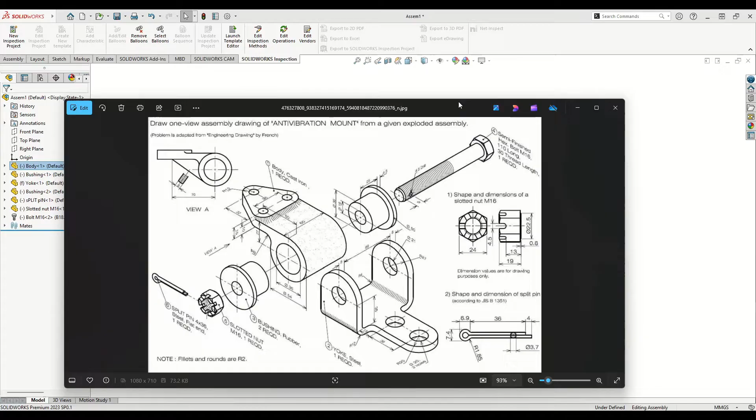So let's begin with this part. Let's open a new SolidWorks document, select Part, and press OK. Now let's make this plane white, and we'll open a sketch in the top plane.

Here we'll make the next sketch. Let's make a center rectangle, just like this, and now let's define this. Here will be 69 millimeters, and this other side will have 54.

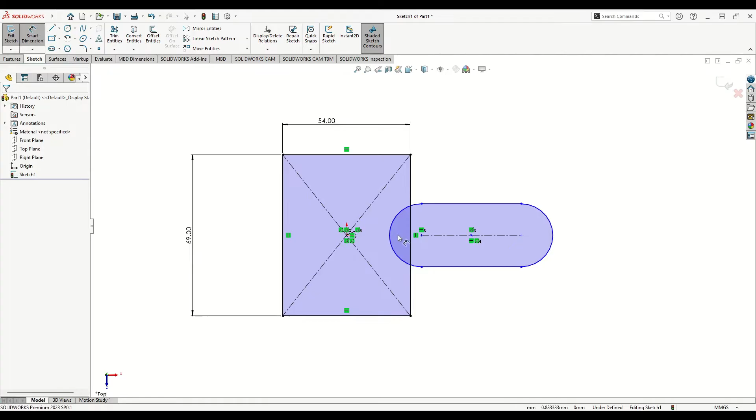Now we'll select straight slot to make the next part just like this. Select this point with this point and make horizontal. Now smart dimension - the radius here will be 20 millimeters.

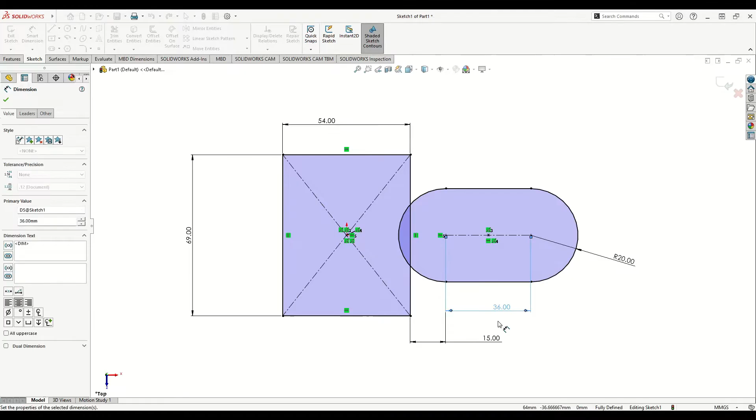From this point to this center point here will be 15. This line, between these two center points, will be 36. And now this is fully defined.

We'll have to use trim entities command to cut these two parts, and apply some more dimensions around here to make them fully defined again. So let's use trim entities and cut these two - press OK, and cut this also.

Select this point and make tangent. Do the same with this other one, make tangent. We'll make all of this tangent.

Now with smart dimension, let's give here a dimension. It doesn't matter - you just have to leave it like this. Actually, it does matter, don't move it up or down - it has to be this dimension.

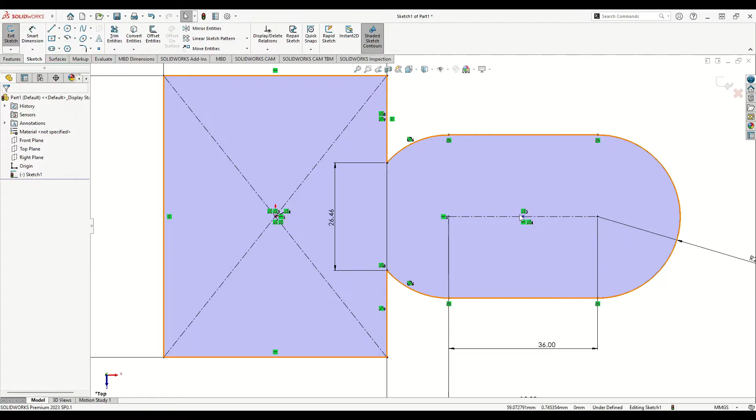Let's make two more circles at these two points. Select circle, one here, select them both and make them equal. Now with smart dimension, let's give the diameter - it will be 20 millimeters.

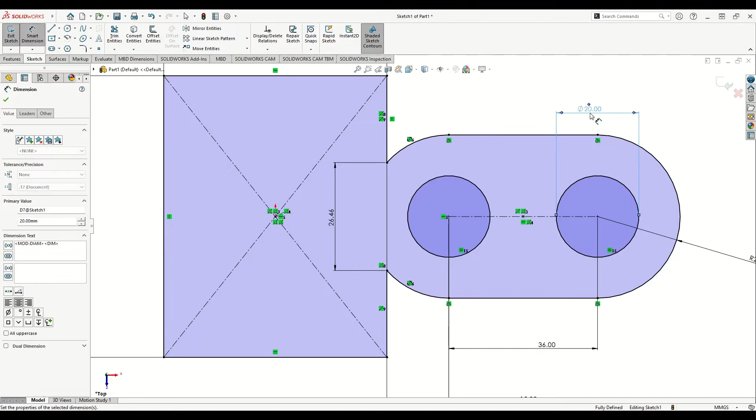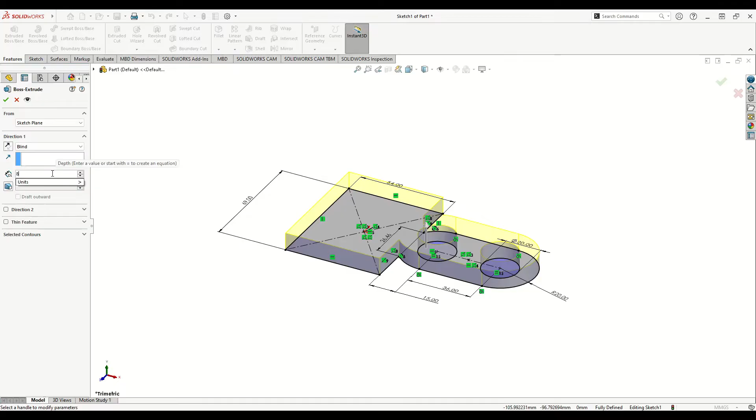Okay, and this should be everything. Now go to Features and use Extruded Boss/Base command. The thickness here will be 8 millimeters. Press OK, and now we'll apply some fillets on these two sides.

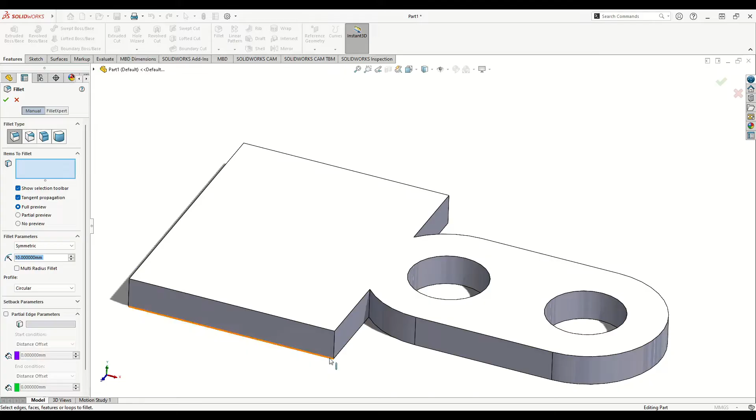Select fillet - the radius isn't given on the drawing, but we have another one for this edge which is 12, so we'll use 12 here too. The drawing says fillets and rounds are radius 2, but that's too small for these two, so let's go with 12. Select this edge and this one, press OK.

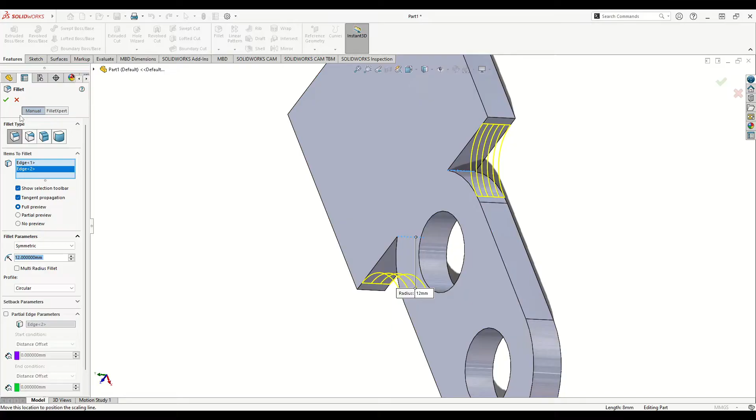Now select this face, open a sketch, and here we'll make the next drawing. Select line and go just like this. Now select center point arc, and make an arc just like this.

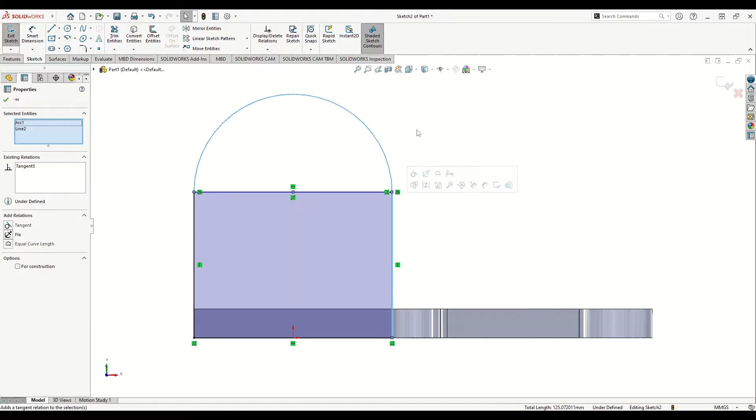Select this arc with this line and make tangent. Do the same for this side. Now select this line and select construction geometry. Let's give this arc a radius dimension - this will have the radius already. We need to give a dimension from this center point to this edge.

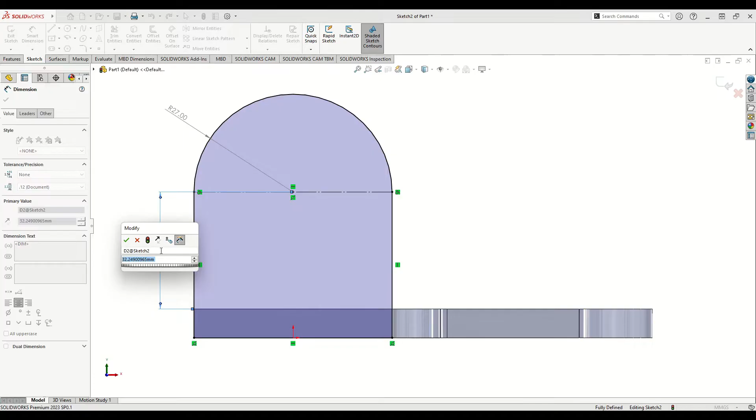This will be 35 millimeters, and now this will be fully defined. Let's select circle again, and make a circle with diameter 21 millimeters. Alright, this is fully defined.

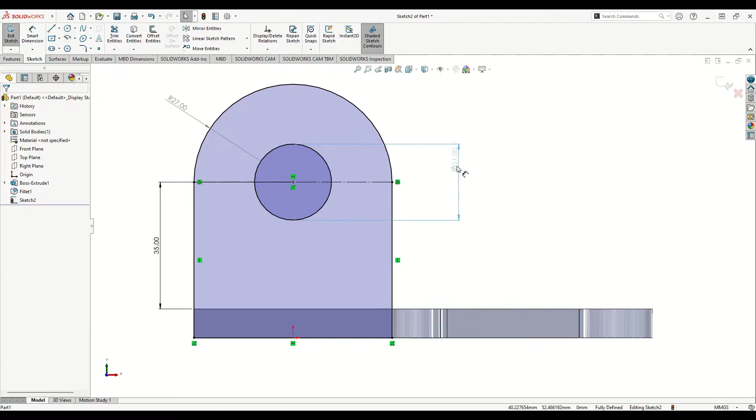Now we'll go to Features and use Extruded Boss/Base command, making sure it extrudes outwards, not inside this part. The depth here will be 8 millimeters. Press OK - I'll have to do the same on the other side, or let's see if we have a plane

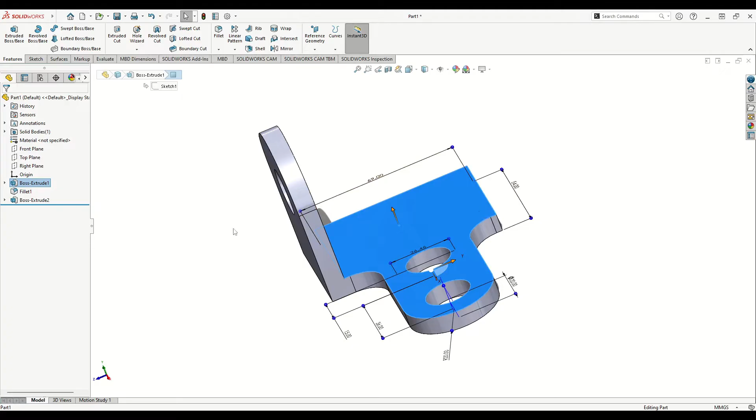inside this part so we can mirror it on the other side. We have the front plane in the middle, so select front plane, go to linear pattern, select mirror, and the front plane should be selected here. Then select features to mirror, and select this body. Press OK - now we have them both.

Now let's check the dimension between them to see if it's correct - it should be 69 millimeters. We'll go to Evaluate, select Measure, and select this face with this one. We see the blue line is the distance between them, and it's 69 millimeters, so this is good.

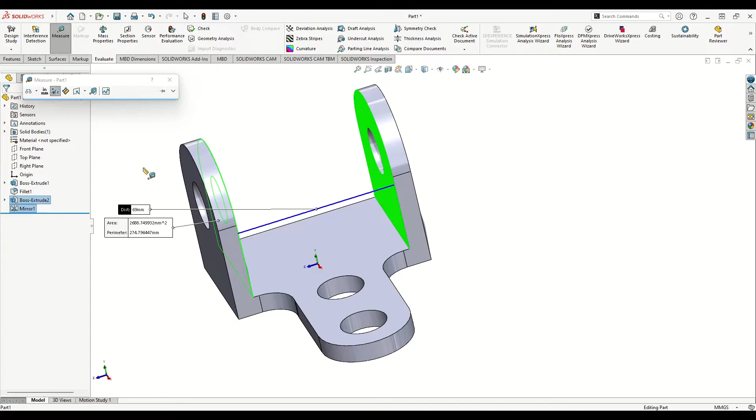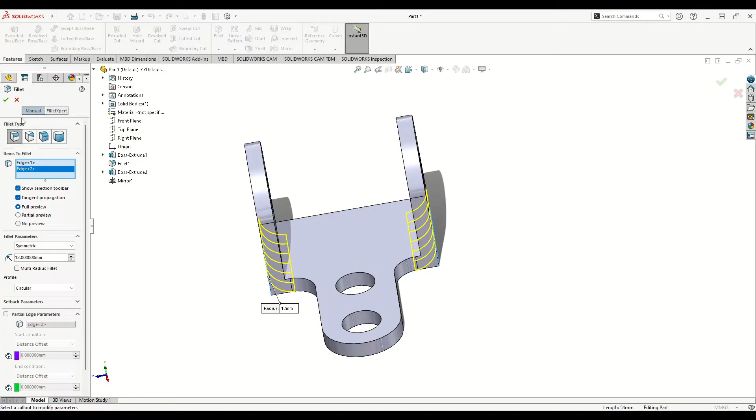Now we'll apply some more fillets to this part. Let's go back to Features, select fillet. The first will be radius 12, for this edge with this one - press OK. The next one will be radius 4, for this and this. Press OK.

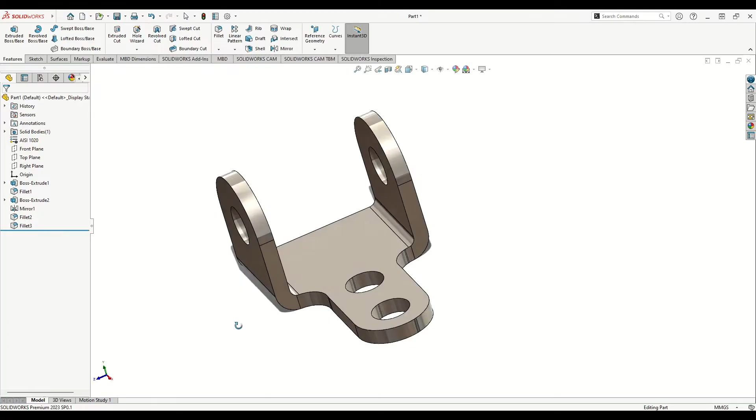Now this should be everything for this part. We'll assign the material - right click on material on the left, Edit Material, and select steel. It's not specified what kind, so I'll go with this one. Apply and close, and I'll have to save this - Save As, and the name.

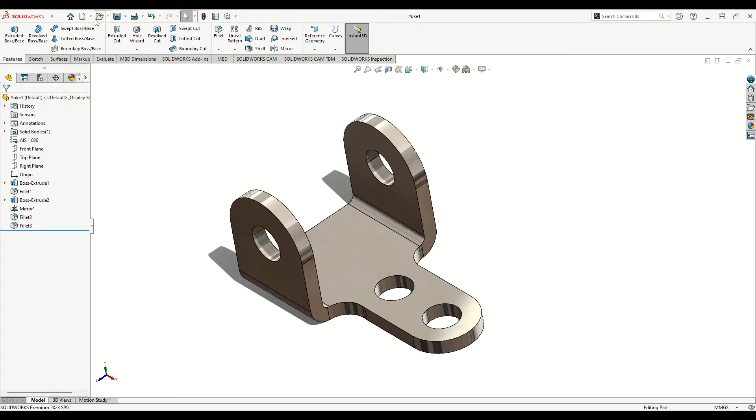We'll have to make a cylinder. Now it's smart dimension, let's define this. The first diameter will be 54, and the smaller one will be 36. Okay, and now let's go to features, use extruded boss base command. And here instead of blind as the direction, we'll select mid plane, because we have to make a rib later, and this will help us to make the rib easier. Because the rib sketch will be made in the mid plane of this cylinder. And now here the depth should be 60 millimeters.

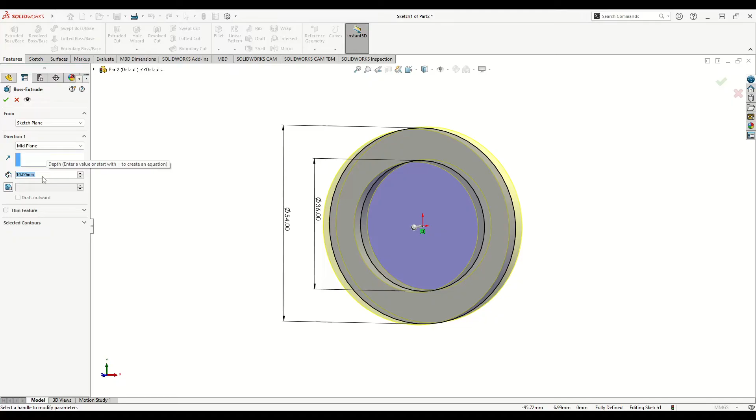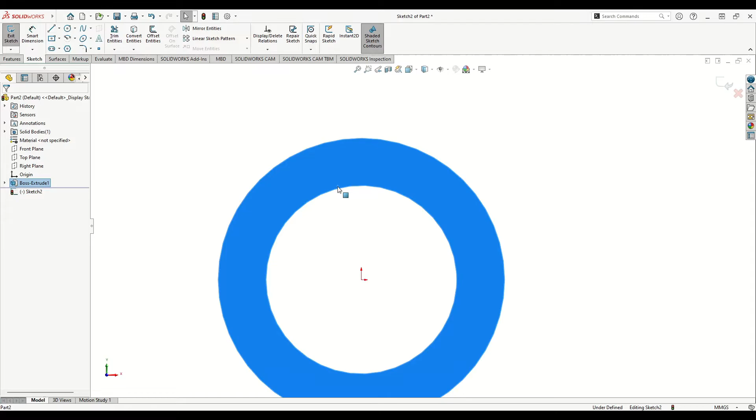Press here OK. Okay, this is looking good. Now we'll have to make the next part. Let's open a sketch on this face, and we'll start by converting this edge. So select this edge and then go up here to convert entities command. And now we'll select line and we'll make the next sketch.

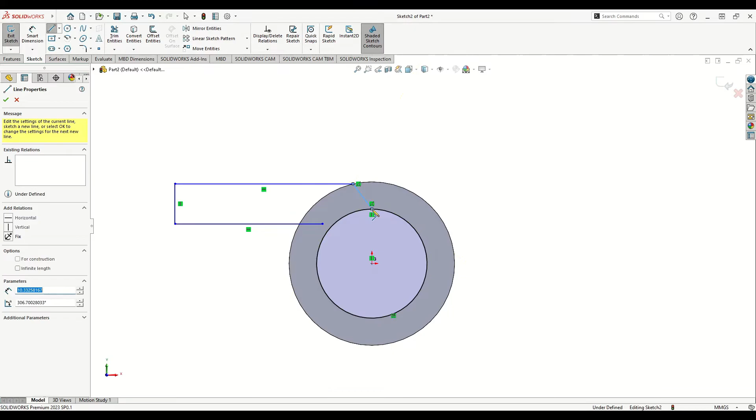Okay, this line should not be tangent to this. So just make a line and then we'll go like this, and then here it should be tangent and then back to this point. Let's select this line, select this edge, select here make tangent, and now select this point and select this circle and select here coincide. And now it's smart dimension.

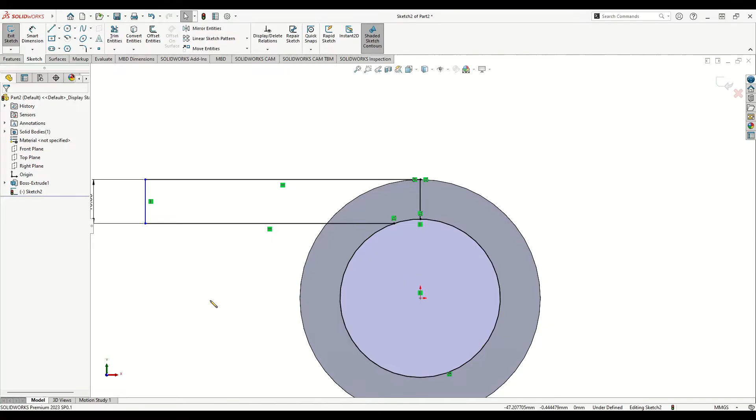Let's give a dimension. Here this line will have 10 millimeters. And now this is looking good. And here we'll have to give another dimension. This dimension will be 50 millimeters, plus 32, plus 12. Okay, so this is the length for this line, will be made from the 3 dimensions we have on the drawing.

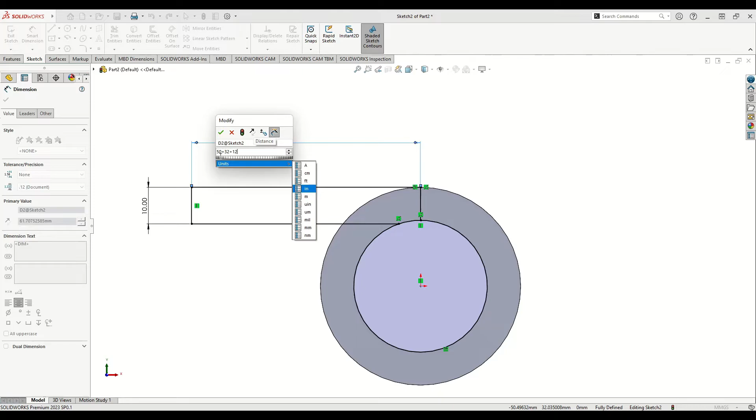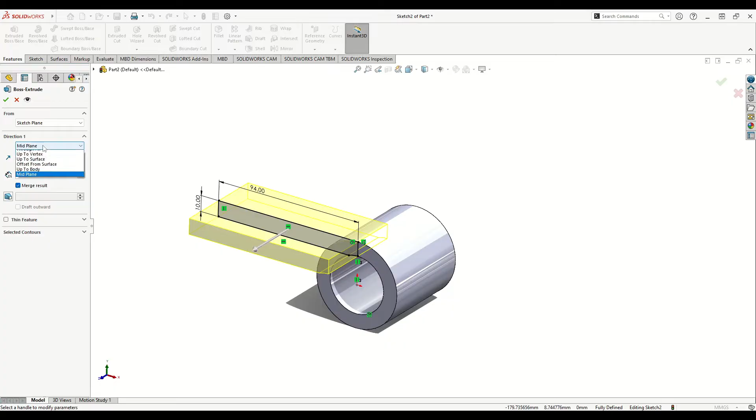And press here OK. Okay, and now let's use trim entities command to cut this extra part of the circle. And now we should have a closed contour right here. Let's go to features and use extruded boss base command. And here instead of mid plane, we'll select here through all, and we'll select here reverse the direction. Press here OK. Now this is looking good.

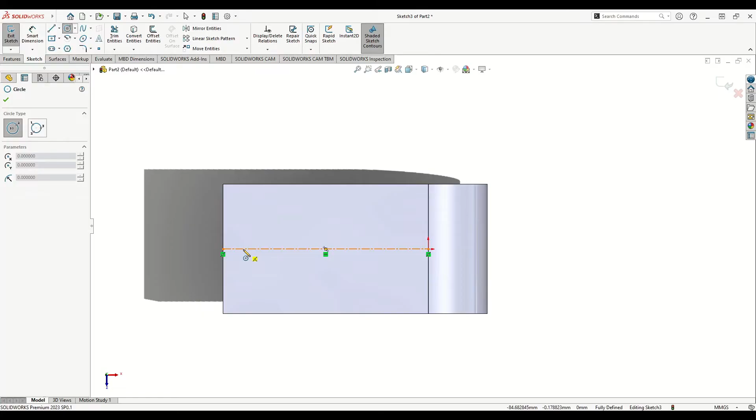And now let's select this face and then let's open a sketch. Here we'll have to make the next sketch. We'll start with a center line, just like this. And then we'll select circle. We'll make one right here, one here, and then one here. Okay, make them all 3 equal, select them, press here equal. Then we'll select this center line and these 2 circles, select here make symmetric. And now with smart dimension, let's give a dimension for this.

The radius will be using it as, actually not the radius, the diameter, as 12. We don't have it on the drawing, or maybe I'm missing it. I looked for it a lot, I cannot see it, so we'll just use 12. Because we have here, let's make a center point arc, starting from this center point, make an arc, and the arc should go like this, and this arc will have the radius 12. In many cases I've seen that when we have this kind of situation, like a circle concentric with an arc, usually the circle has the diameter as the arc has the radius. So we're gonna apply the same thing here. I'm not sure if it's the case, but I cannot find the diameter for these circles, for these holes on the drawing. So yeah, let's keep going.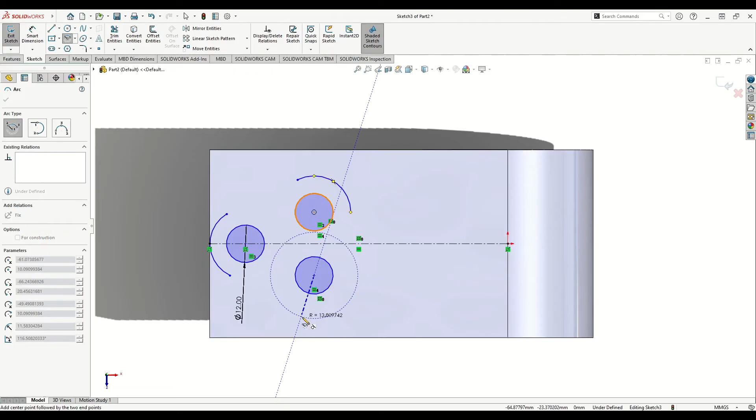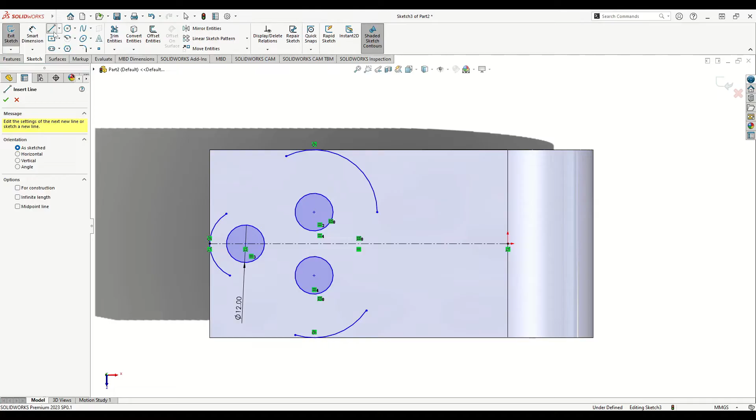Let's make the same thing. We'll make another one and right here another one. Okay, let's select this circle, this arc with this edge, make here tangent. Let's do the same for this one, tangent, and for this one, tangent. And now we'll have to select line, and we'll have to connect all of these ends like this. Select here this point, select here make tangent, do the same for all of them.

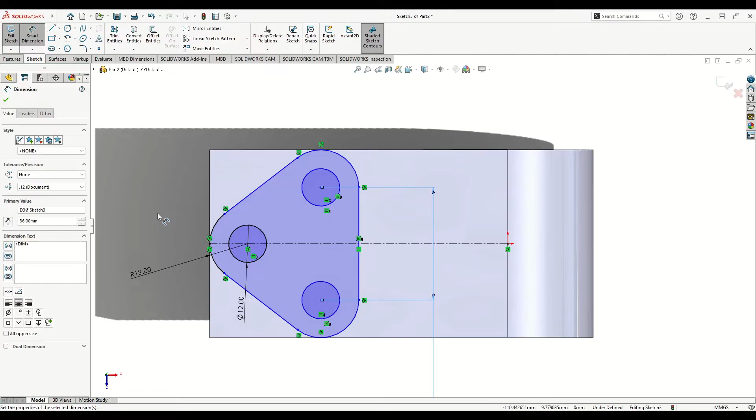Okay, and now with smart dimension, let's give a radius for this. Arc will be 12. Okay, and now we'll have to give a dimension in between these two, and here will be 36. Press here OK. And now another dimension will be in between these two center points, and here will be 32. And now this is fully defined.

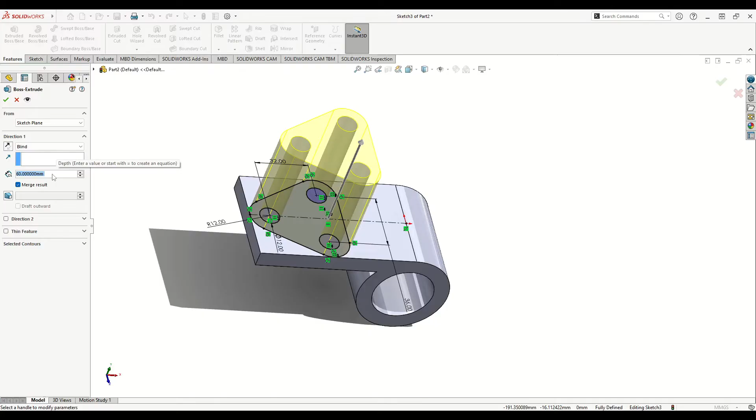Now we'll go to features and we'll use extruded boss base command. And here will not be through all, will be blind as the direction, and the depth will be 60 millimeters. And make sure that it's going up. Press OK. Nice. And now we'll have to make the next thing.

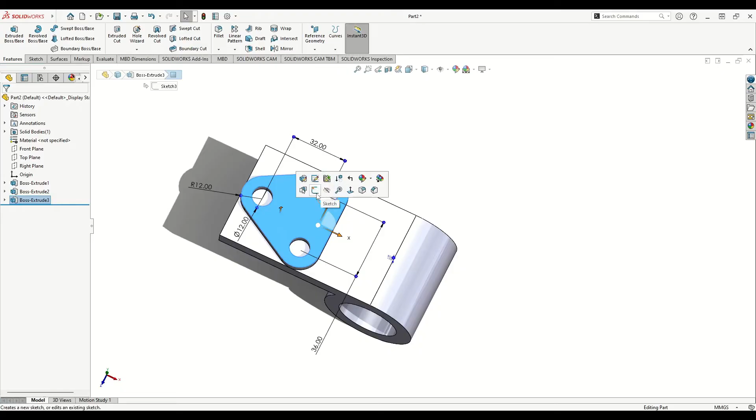Let's open a new sketch on this face. Okay, and here we'll have to select this face. Actually, no, select these 3 circles. Select here convert entities command, and then select convert entities command again, select this, and press here OK.

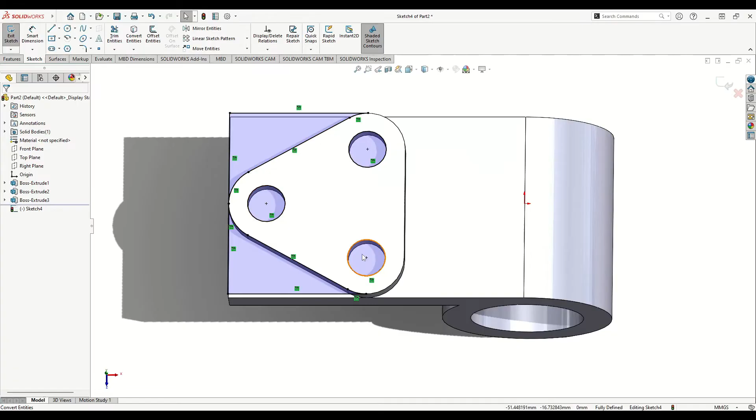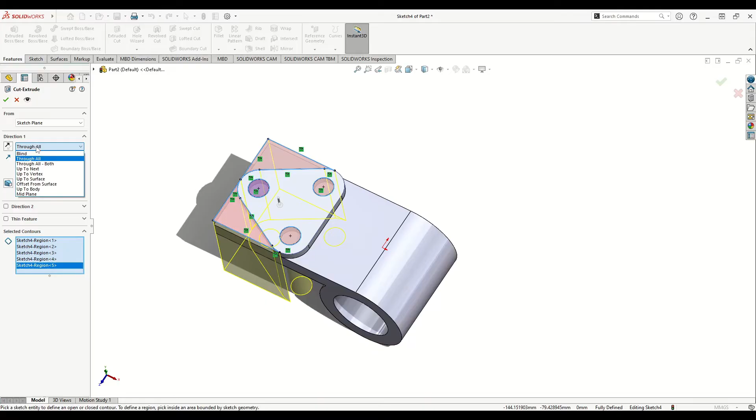Now we'll have to cut this extra material. Go to features, use extruded cut, and select the contours we want to cut, so this and these 3 holes. Press OK. Actually, select through all, or better keep it up to next, because later we'll have a rib, so we don't want to cut anything from it. Press OK.

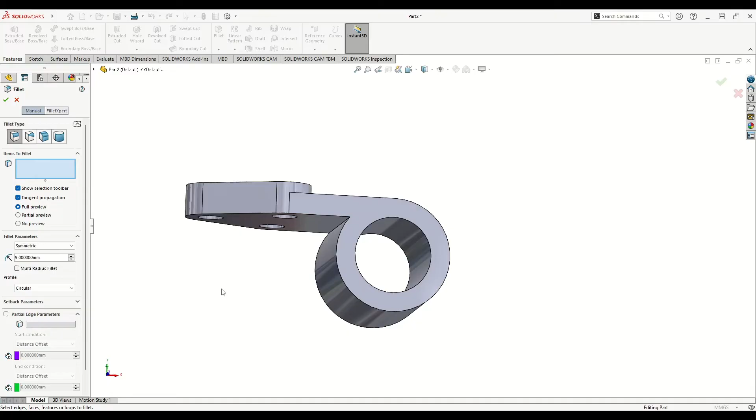Now this is looking better. Let's apply a fillet with radius 9 millimeters. Select fillet, here will be 9. Let's select this right here and press OK.

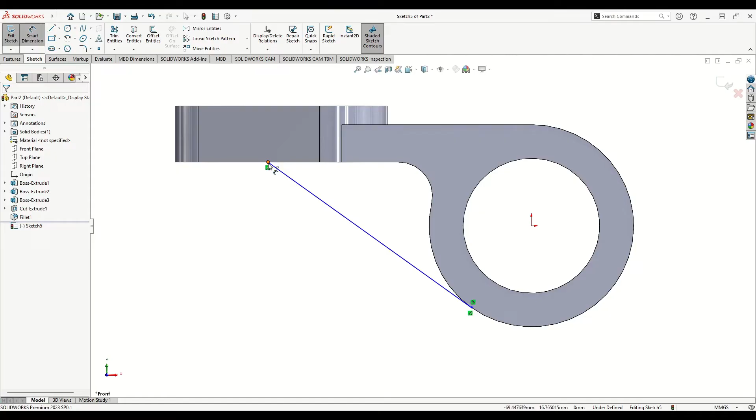Now we can make the rib. To make the rib, we'll use the plane we kept in the middle of this cylinder, which is the front plane. Select front plane, select sketch, and now the only thing we have to make is a line. Make a line just like this. This line should be tangent to this edge, so make it tangent. Now with smart dimension, let's give a dimension from this point to this center point, and here will be 70 millimeters.

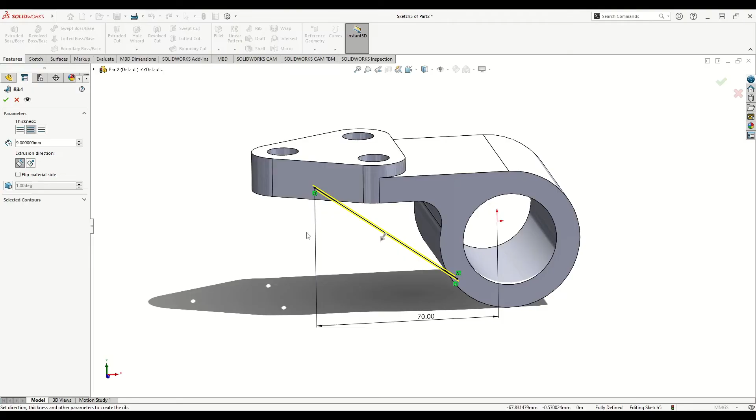Now this is black, which means it's fully defined. Let's go to features, select rib command, and here the thickness for this will be 9 millimeters. Keep this both sides for the thickness, and then select this arrow to be upwards. Select flip material side. Press OK. Now we have the rib.

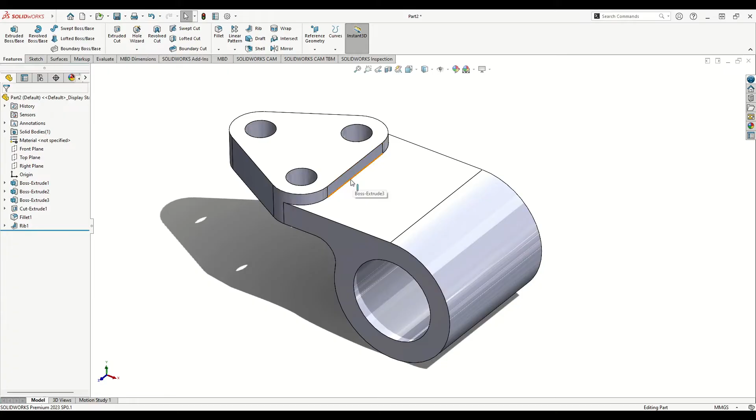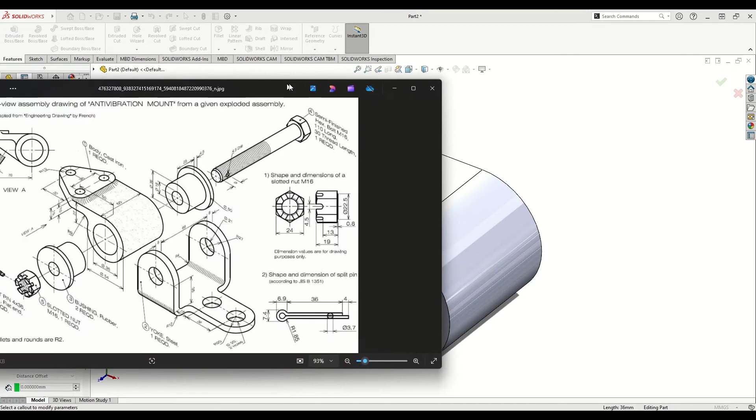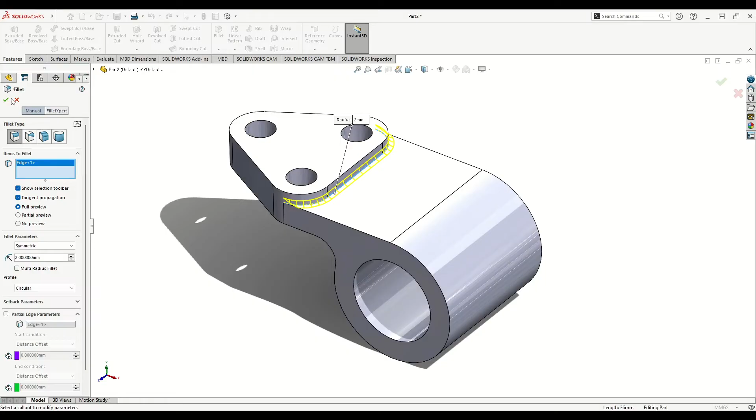This is almost finished. Now we only need to apply a fillet right here. As it's saying on the drawing, all fillets and rounds are radius 2. We can use radius 2, but when you look on the drawing, it's looking like it's more than radius 2, so we'll just make it 2 for now. We can see it's a little smaller, but if we make it 4, it's exactly as showing on the drawing. I don't know how accurate this is, but I cannot see a specified radius for this, so we have to use radius 2. Let's make it 2. Press OK. Now this is finished.

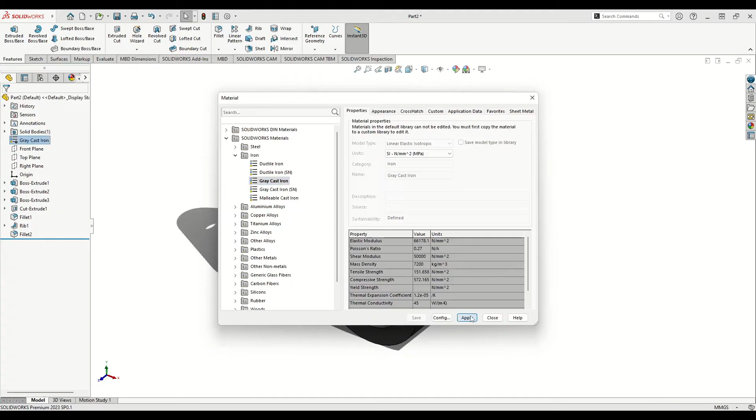Now we'll have to apply the material, which is cast iron. Right click, edit material, and we'll go to iron. I don't know which one of these, but we'll go with this one. Apply and close. This should be it for this body. Now let's save it and move to the next part.

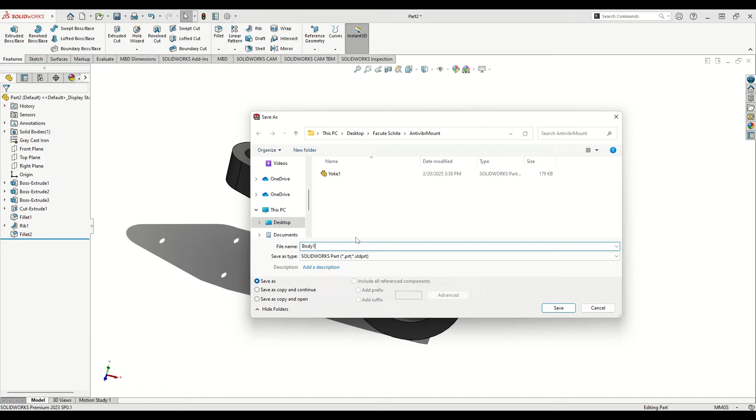Save as. This will be the body. Save, and now let's go and open a new SolidWorks document, a new part.

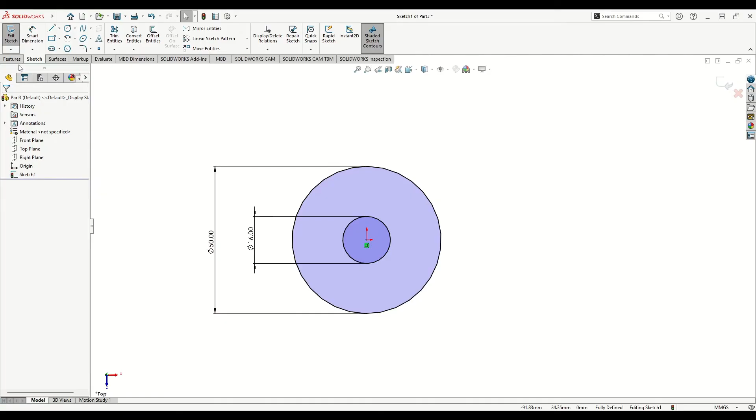Now go to features, use extruded boss base command, and here the thickness will be 4.5. Press OK. Now we'll open a new sketch on this face. Here we'll have to select this edge, select convert, and I will make another circle.

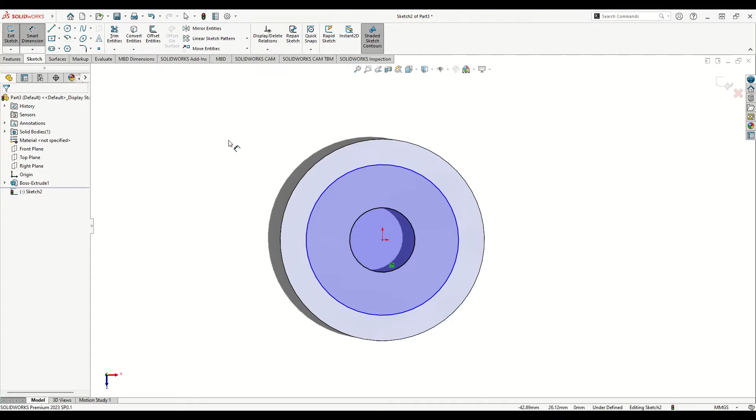This one will have diameter 36. I'll go to features again and use extruded boss base again. This time here will be 25. Press OK. Now this is the bushing.

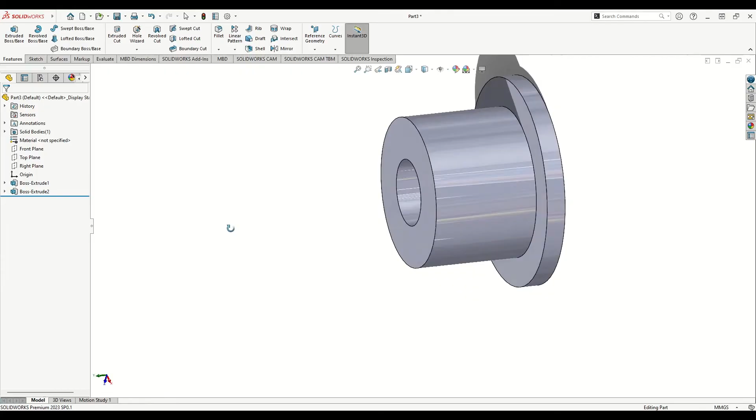We'll have to apply some material to this one also. So right click, edit material. This one will be made from rubber. I'm not quite sure which one, so I'm gonna select this one, silicon rubber, and close.

Okay, this is the bushing, the last part we're gonna make, because the nut and the split pin I already made 2 tutorials for them, so you can make them from those tutorials and then assemble all of them right here. Now let's save this one also.

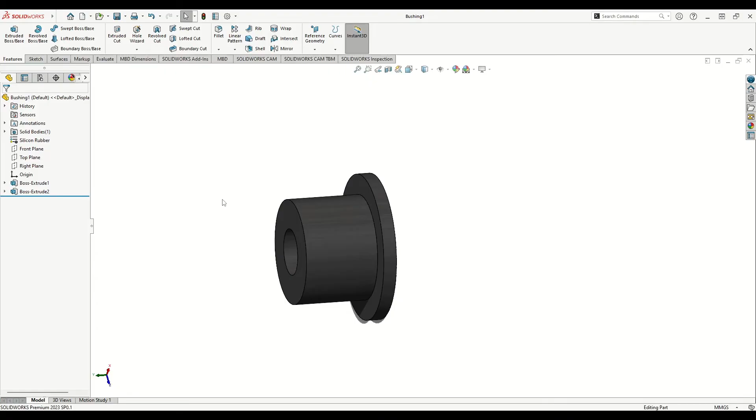Now let's assemble all of them. Let's open a new document, assembly, press OK, and let's insert all of the parts we just made right now. This one, and this one. And now I'm going to search for the next one, the other parts.

When you want to insert other parts into your assembly document, you'll go to insert, component, existing part assembly, then go to browse and search for your parts. Here one of them, this is the split pin. Now we'll have to insert the next one.

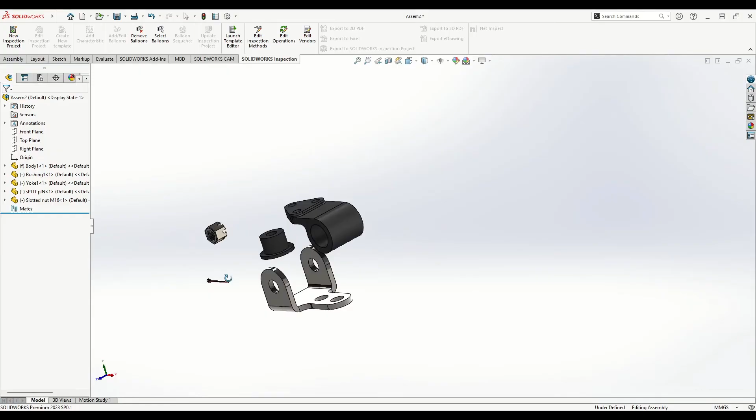Insert component, existing, browse, and then the next one, the nut. Then we'll have to insert also the bolt. To do that, go to design library, on the right, toolbox, use the metric one, then bolt, screw, hex head. From here we'll select one of these 2. We're gonna select this one, hex bolt. I'm gonna right click on it and select create part, because we want to edit something.

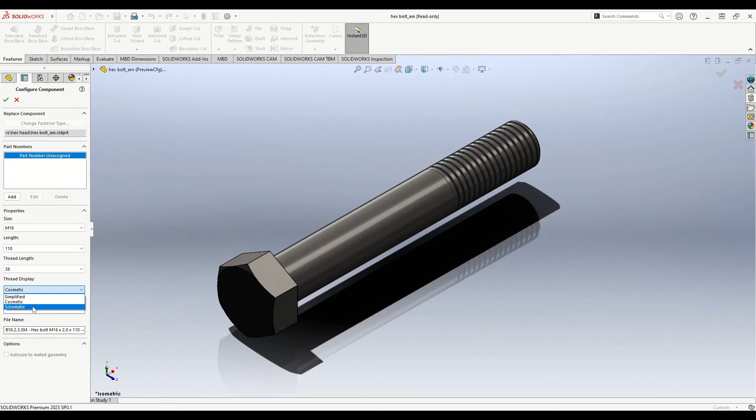So we can choose here the size. The size will be M16, the length will be 110. The thread length on the drawing says it should be 30, but we cannot choose 30 from here, so we'll go with 38. Each of these options looks similar, nothing special, but I'm going to keep this one because it's looking better. Then we'll press OK.

Now we'll have to search for it. It should open in a new window. Let's make this plain white. Now here on the left we can see that we are at properties.

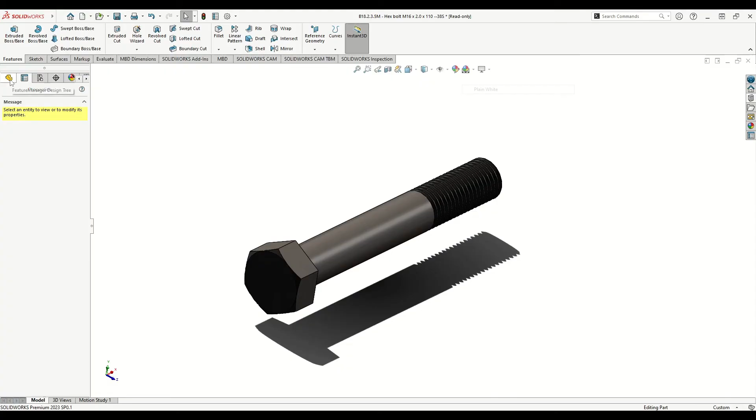We'll go on the left at feature manager design tree, and here we'll have to add a small hole in this bolt for the split pin to go in. To do this, we'll have to find the plane which is in the middle of this.

We can see that this plane is in the middle, plane 1. So select plane 1 and select here to open a new sketch. If it asks you something like you are about to change or edit this, just press OK and you should be fine.

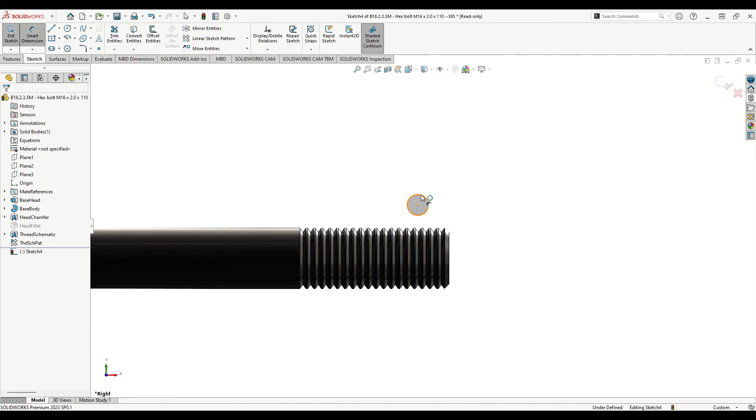Now let's select circle and make a circle here. We're gonna move this right here. Select smart dimension, and this circle will have the diameter 4.5. If you see something like this, just press OK. I think we could also use hole wizard for this hole, but I'm not sure how well it would work with this fillet, so I prefer to do it like this.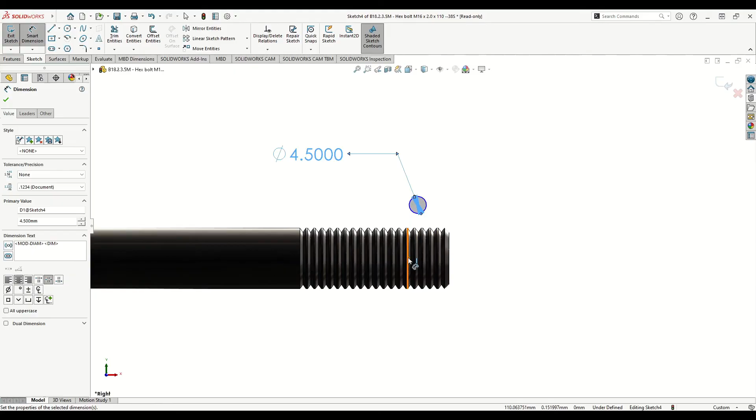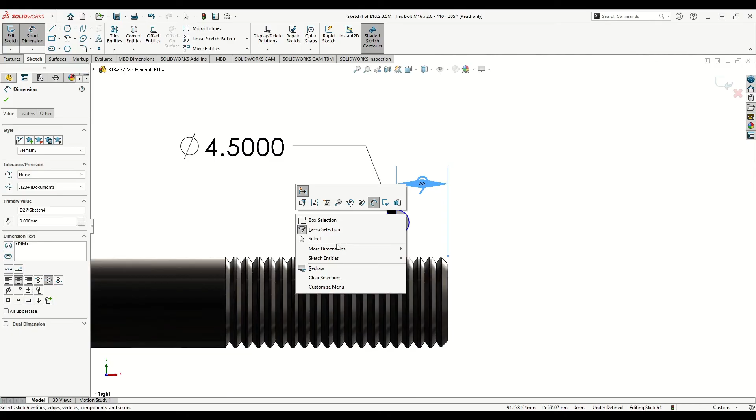Now with smart dimension we'll give a dimension from this center point to this edge, and it will be 9 millimeters. Now to bring this inside the bolt, we'll select this point with the center point from the circle and select make horizontal. Now this, as we can see, is black, it's fully defined.

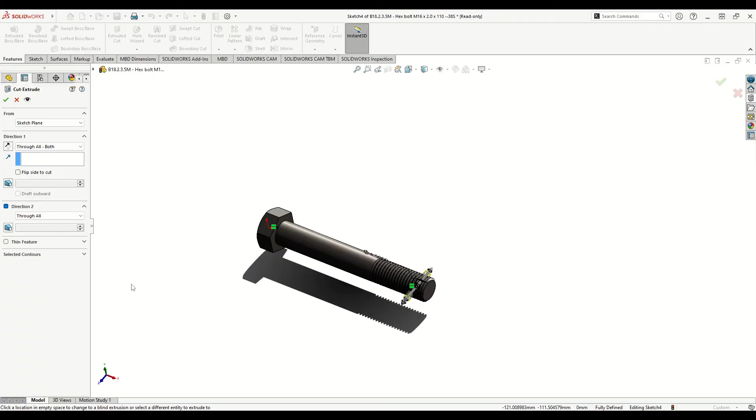Go to features, use Extruded Cut, and here instead of up to next we'll select through all both, which means it's cutting through both sides. Press OK, and now we have the hole. Now we should also save this, so save as.

Okay, this should be the bolt, or at least the closest bolt that we can insert from the library and edit it to make it work for this assembly. The only thing it's missing, or not right, is the length of this thread. We cannot actually change that.

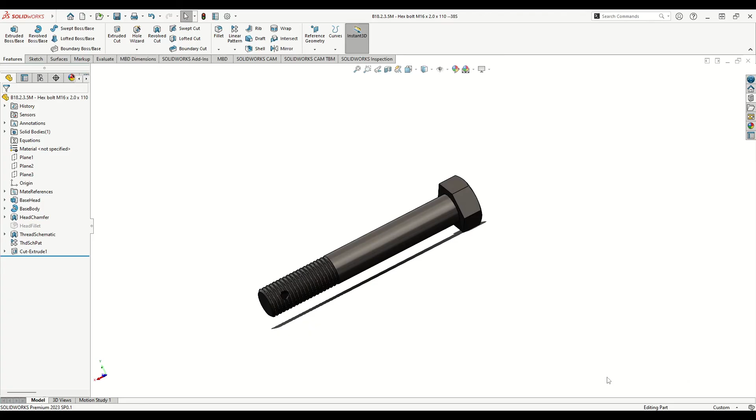Now let's go back to the assembly and insert the bolt right now. We can actually select it from here and press OK. As we can see, we also have the small hole.

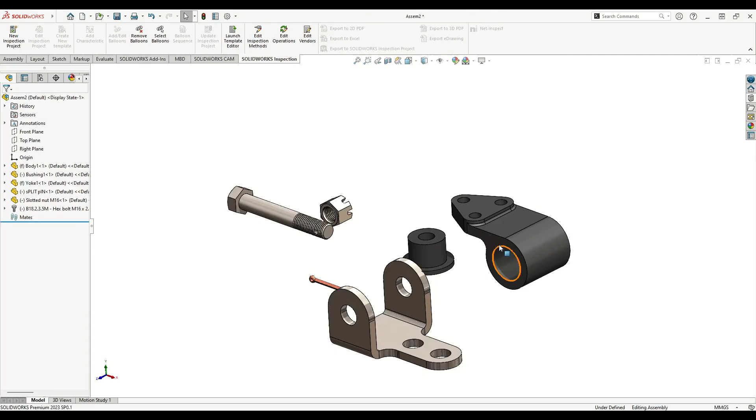Let's make this plain white. Now let's make this part fixed, so right click on it and select fix. Let's make this one float, right click and select float. Now let's assemble them.

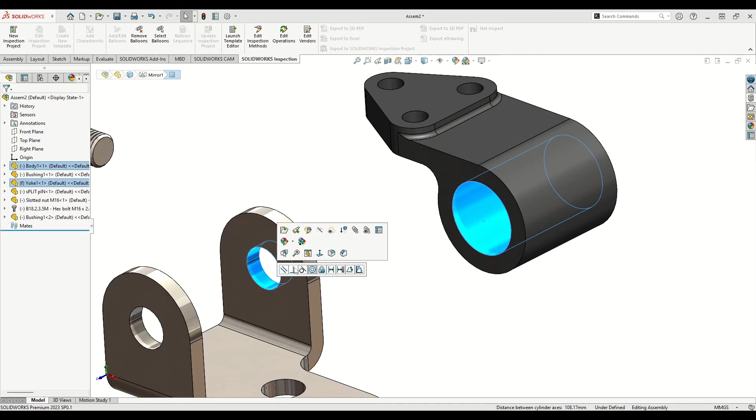I'm gonna drag them to this other side. We actually need one more of this, so with control pressed, left click and drag it. Now select this face with this one and select here concentric. Now everything is easy, we only have to assemble them. Select this face with this one and select here concentric.

Now we'll have to select this face from the bushing with this face and select coincident. Then select this face with this one, and this one with this one, and select concentric. Select reverse to flip the alignment. Okay, and let's try to drag this one outside.

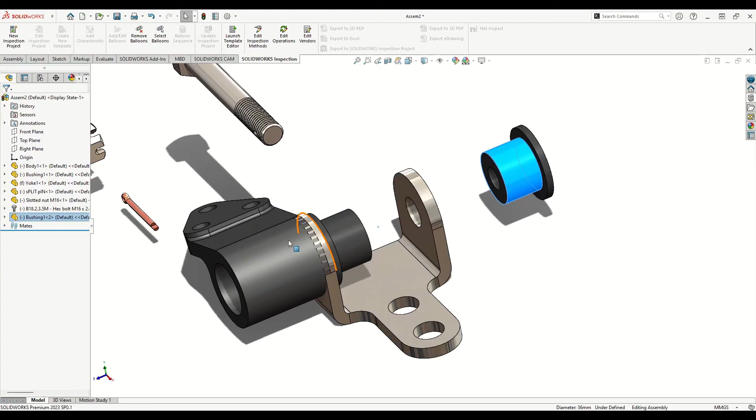Alright, select this face with this one and select here coincident, and then select this face with this one from the bushing and select coincident.

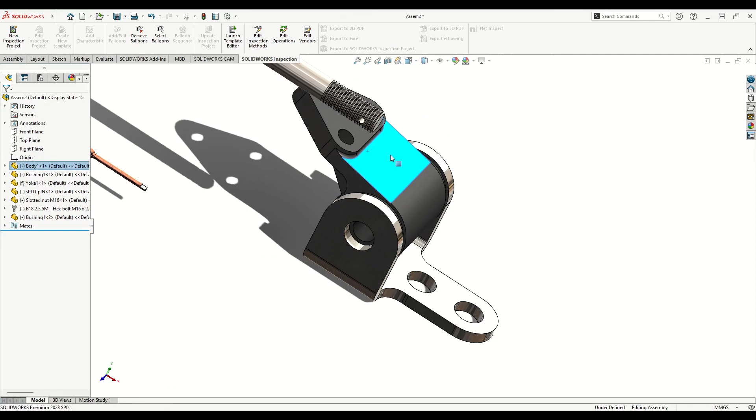Okay, and I will have to insert the bolt, so select this face from the bolt with one of these faces and select concentric. Let's flip the alignment. Select this face from the bolt with this one, select coincident.

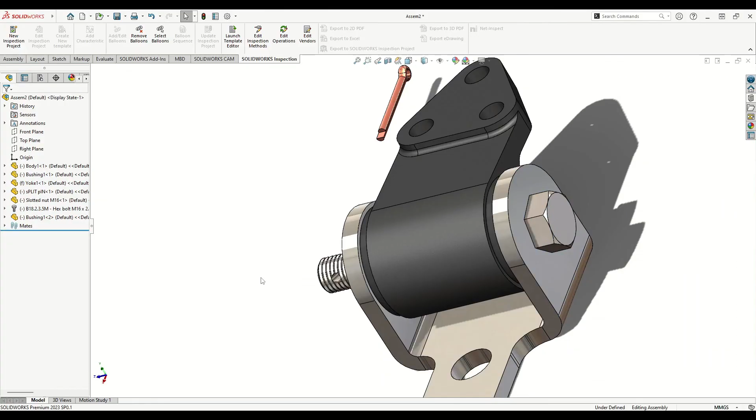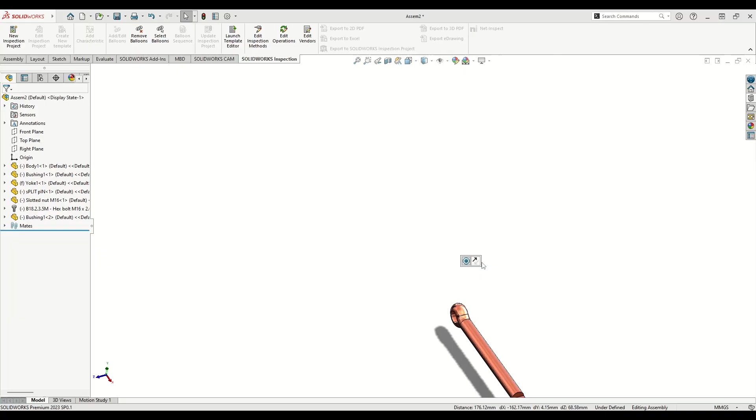Now let's insert the castle nut. To do that, we'll have to select one of these round faces with this edge or this face, and select concentric. Let's drag this out, and we'll have to flip this alignment.

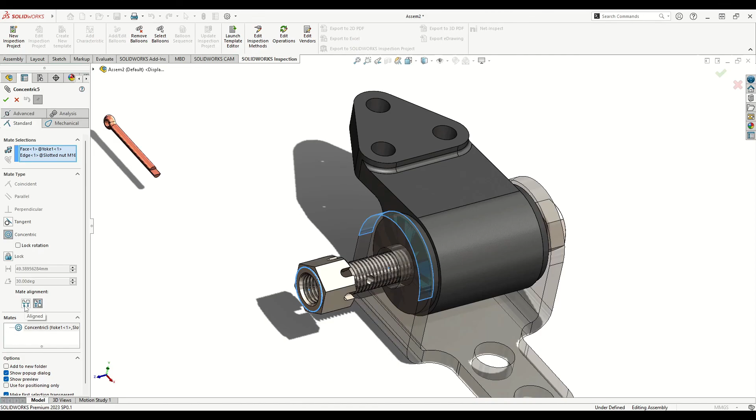To do this, go to mate and select the last mate, right click on it, edit feature, and we'll select here to flip it, and press OK. Now select this face with this one and select coincident.

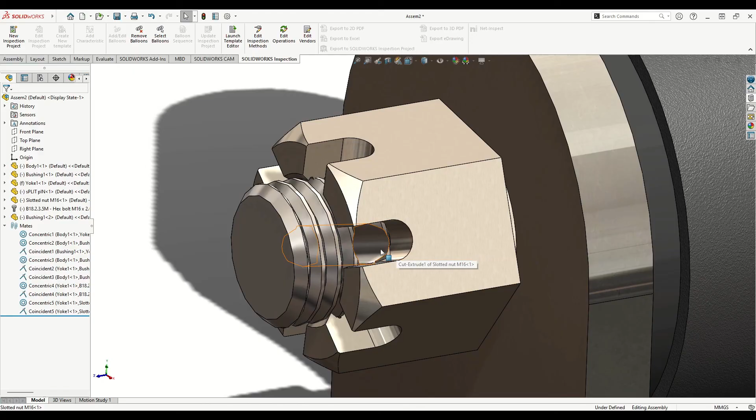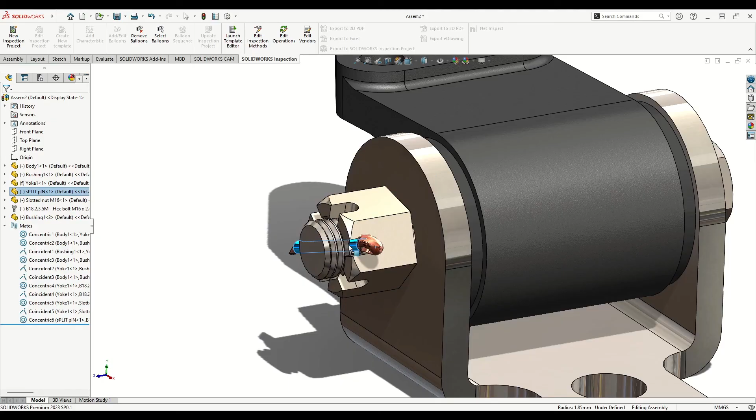Now we'll have to insert the pin. If you don't have this hole aligned with a slot from the castle nut, you just have to rotate it, either the nut or the bolt, until it's aligned, then select the face from the pin and this face, and select concentric. We can even flip it, and this should be it.

This is the whole assembly. This is the anti-vibration mount, and everything is